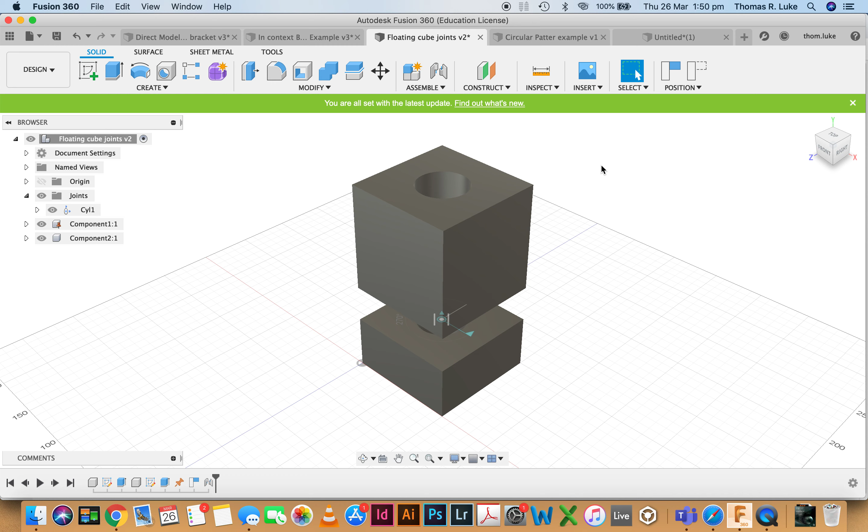Okay, so in this video, I want to talk to you about joints. Joints is a really powerful way of being able to bring multiple aspects within a project together. So if you have multiple components and you want to bring some sort of relation between them once you've modeled them up, jointing is a great way for you to apply these relationships and then explore them.

So in the example that I've got here, we have these two bodies and we have a cylinder cut through both of them. So we have a hole that cuts through, okay? Now, what I've done in this project is I've applied a joint to both of these bodies, and so they now relate as if there is essentially a dowel that they're both sleeved around, okay?

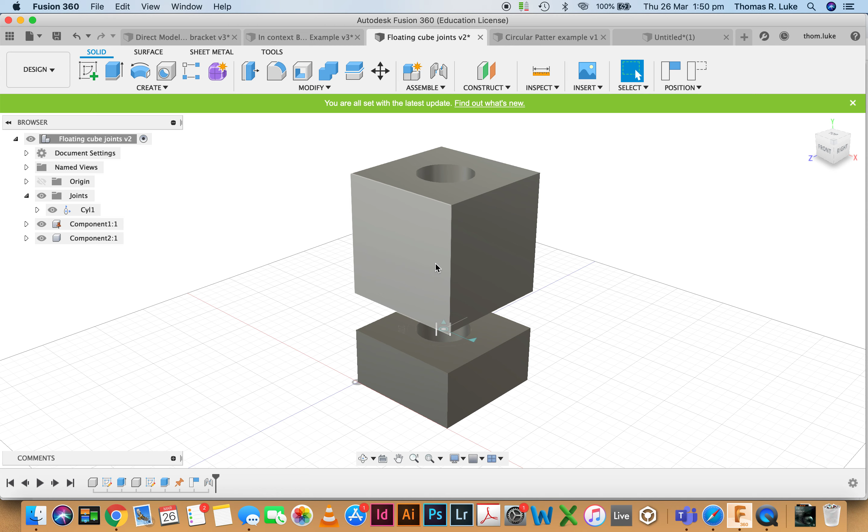So what I'll do is I'll show you how I did that. I'll come back and I'll delete. Now you can see at the moment that I modeled two objects separate to each other, and you can see these are my two sketches that I created, and here they are. At the moment, this object is floating and this object is grounded.

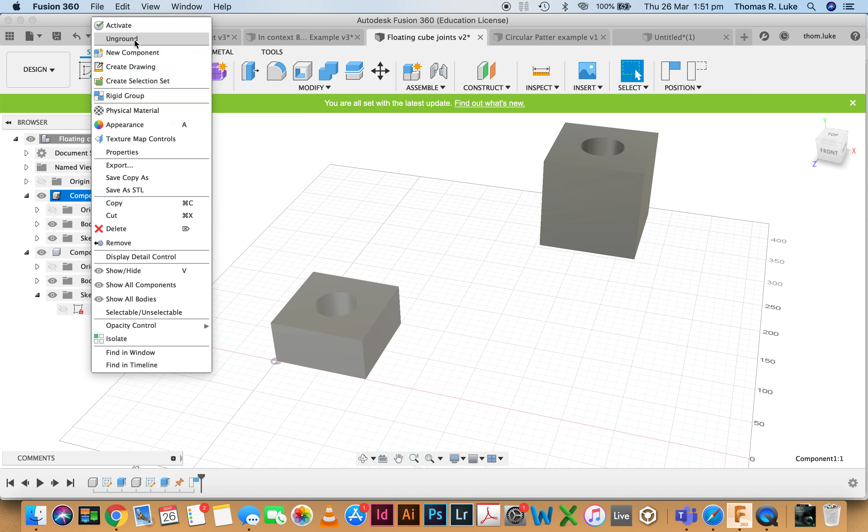Grounding is a really useful function to use within Fusion, and grounding enables you to stop components moving about when you're trying to work on them. So you can see here when I right click on this component in the component browser, I can unground it, and now I can move it around. If I bring it back here and select ground, it's not going to move, okay?

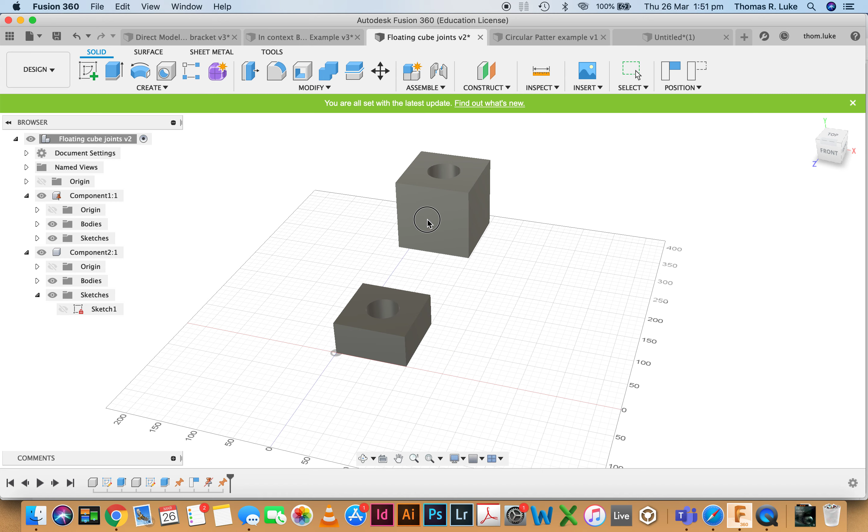And when you're doing joints, I would recommend at least having one object grounded, because then you'll know whether your joints are actually functioning the way you want them to. So I've got my component grounded, and then I come up here to assemble, okay? And I want to come down to this option, which is joint.

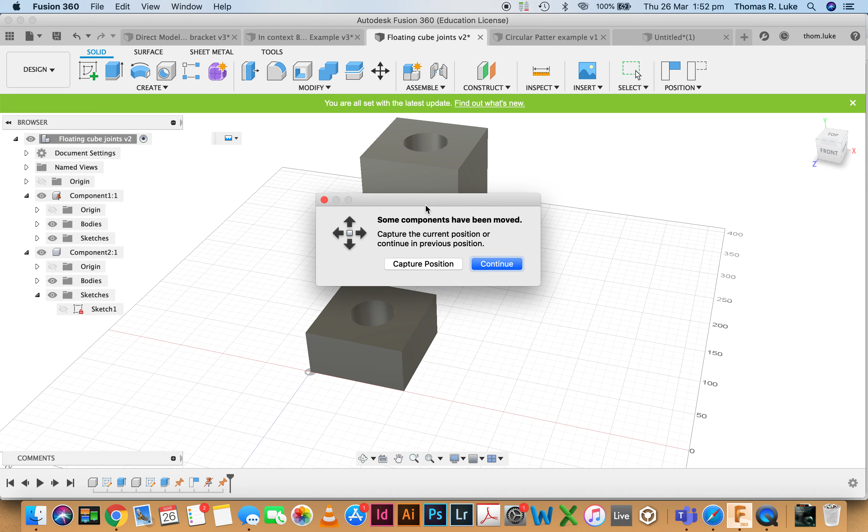I click on that, and it's going to ask me if I want to capture my position. Capturing position, essentially what it is doing is saying, do you want to capture the position as it stands now, or do you want to go back to where everything was sitting when you modeled it? I didn't model that object where it is now. It was modeled over here next to those two, but I've since picked them up and moved them around. So I have that option. What I'll do is I'll just use capture position so I know where everything is.

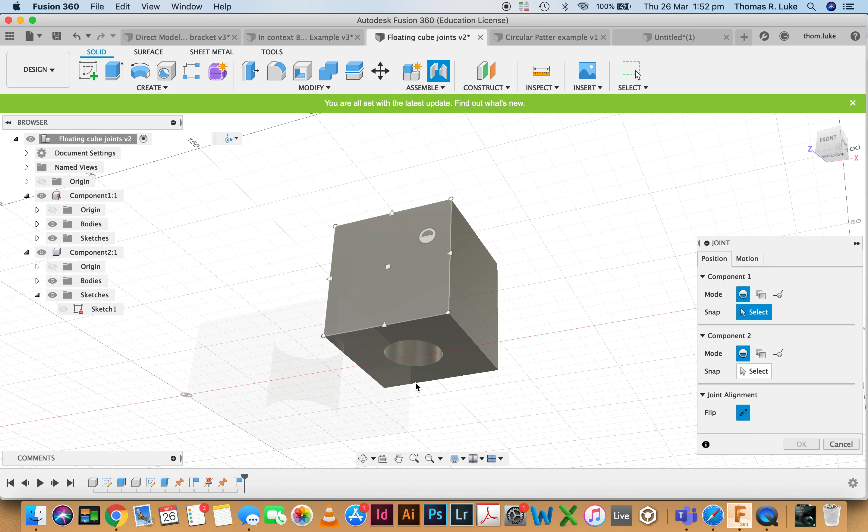And now it's automatically going, right, you have an object, where do you want to apply the joint? So in this case, I'm going to come in, I'm going to look at my cylinder, and I'm going to apply my joint inside the cylinder. It's now going to jump across and offer this selection. I'm going to select that cylinder. And you can see that it's automatically jointed, but also suggesting what sort of joint.

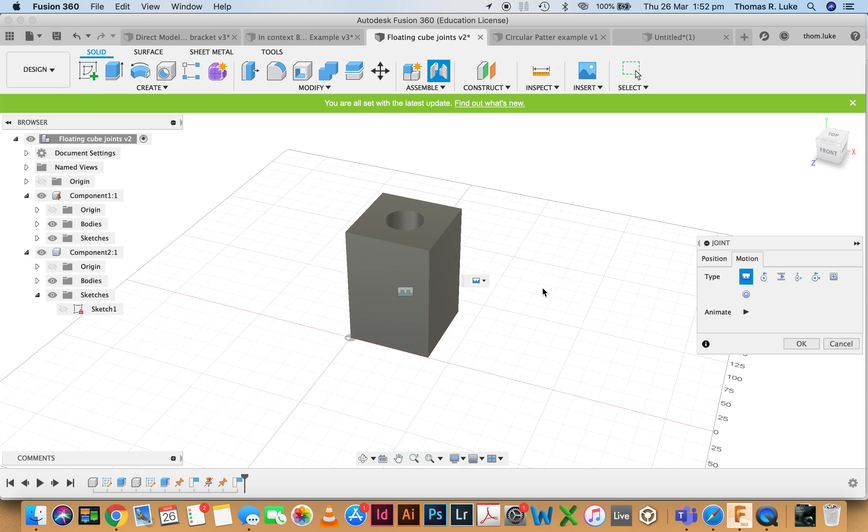And there's multiple joints that we have options from. If I come back to rigid, okay, they're fixed together. If I come to revolute, you can see that it's rotating around the axis of the cylinder. Slider is essentially allowing me to slide along the length of that joint. Cylindrical allows me to slide and rotate, which is realistically what would happen if these were sharing a sleeve. Pin slot, which in this case is incorrect for this type of joint. And then planar, which you can see is sliding across the planar face.

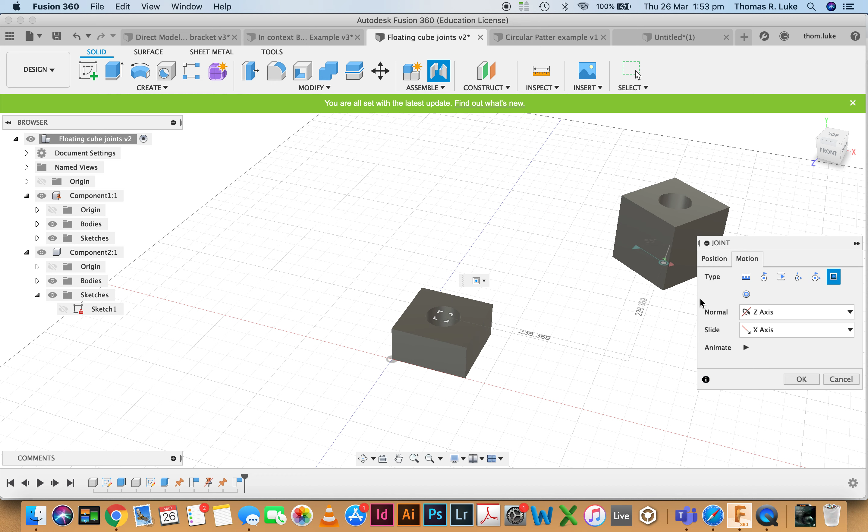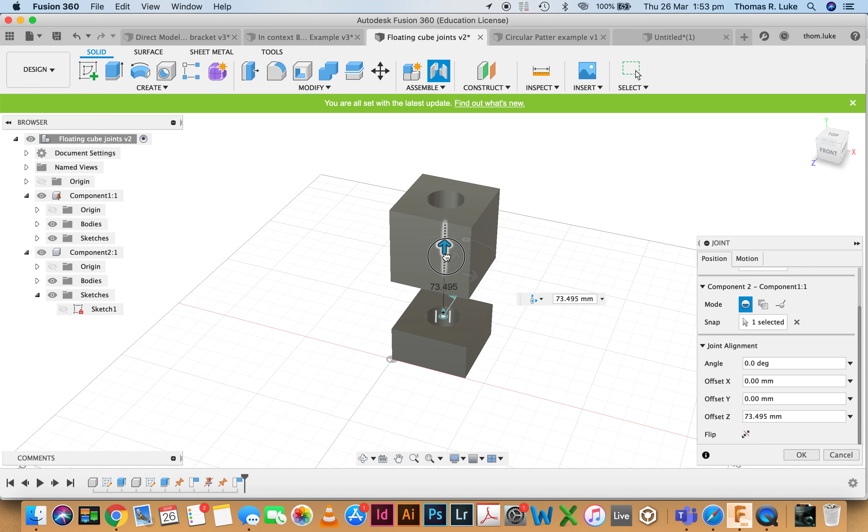So if I come back to cylindrical, you can see that our joint is working. We've got them both selected. Our alignments are good. We can flip if we so wish. We also have the option here to slide up and down, and you can see that it's adjusting this toggle as we go. What I'll do is I'll set it to 0 for the time being, and then I'll press OK. And we can see that our joint has come in a separate place to our components.

It lives in its own section of the browser. And that's because you'll end up with multiple joints, and they might be across multiple components. So the joint doesn't want to be hidden away within one component. If I come in here and have a look and right click, you can see that there's some options with the joint, okay? I can come back and I can edit the joint, and then I can make changes to that joint as I see fit.

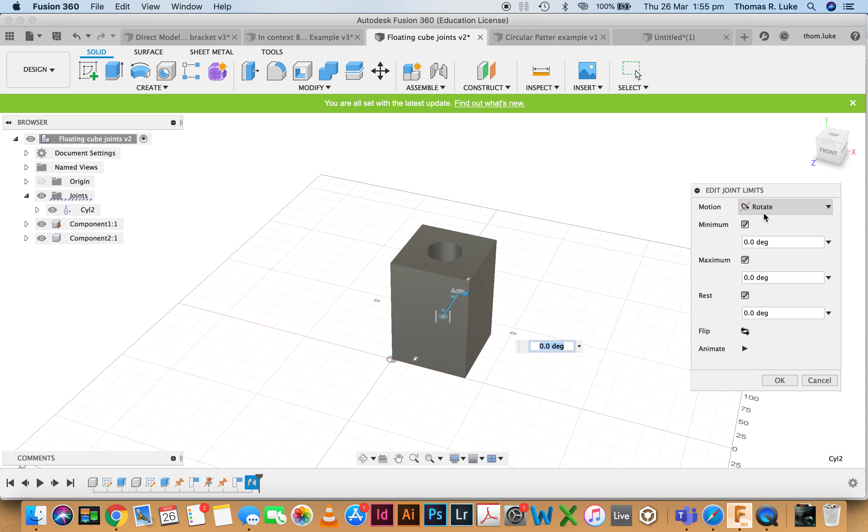The other option that I have is I can edit the joint limits. So editing joint limits means that I can essentially put limitations on how far or how little I want this object to be able to move. So you can see in this option, I've adjusted the slide. Or in this option, I can adjust the rotation. So now you can see that I can only slide so far and I can only rotate so far.

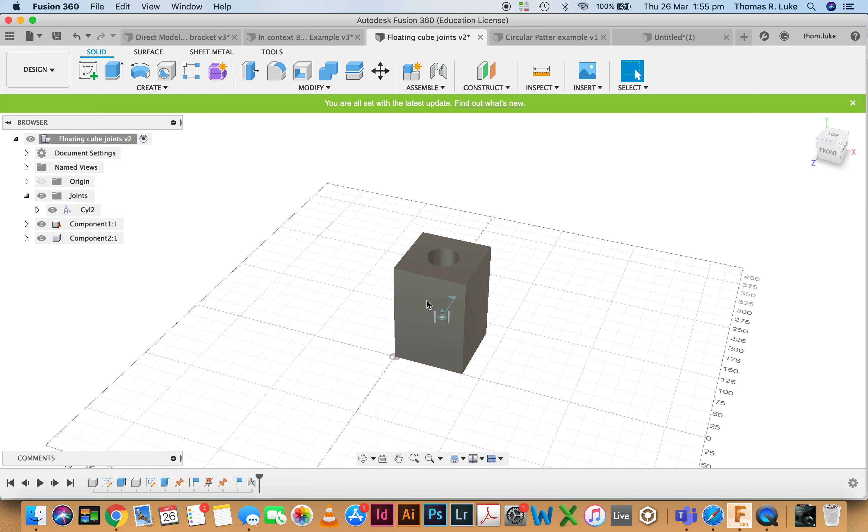And setting limitations can be applied to any joint type we wish, okay? And that's the power of jointing. We can have multiple components within assemblies, we can apply multiple component joints, and we can slowly build models where they will interact with each other via the joints that we create.